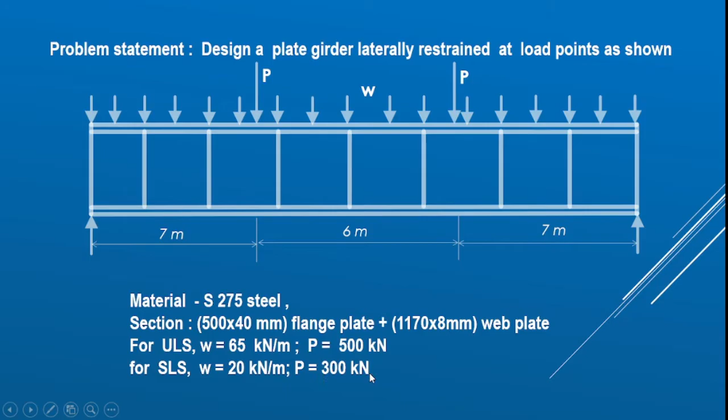For ultimate limit state, that is for the design, the value of W is taken as 65 kN per meter, and the concentrated load at each point is taken as 500 kN. For the serviceability verification, that is for the deflection checking, W is taken as 20 kN per meter and P is 300 kN. So this is IDEA StatiCa member.

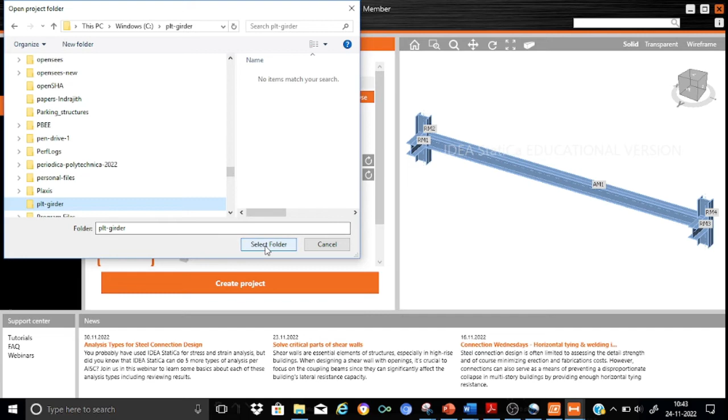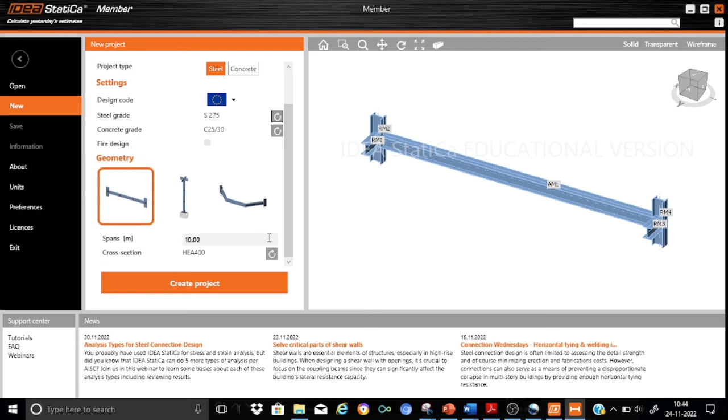The next thing is that the design code will be the Eurocode, and the material I would like to change to S275. So let us take it as S275. Okay, so concrete is not relevant to us. Here, as you can see, there are various geometries. Our geometry is a very simple straight beam, so for span, we can just write as we have already discussed, it has got a span of 20 meters.

And for the cross section, what we can do is that we can directly define it in IDEA StatiCa. So let us, for the time being, just create the project. So we just create the project, and you can see that it has already come over here.

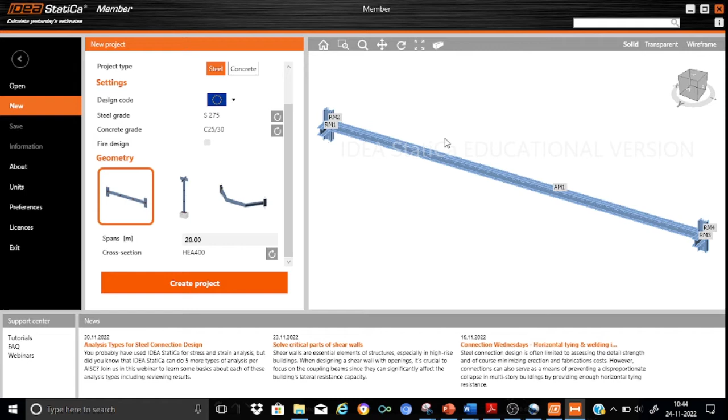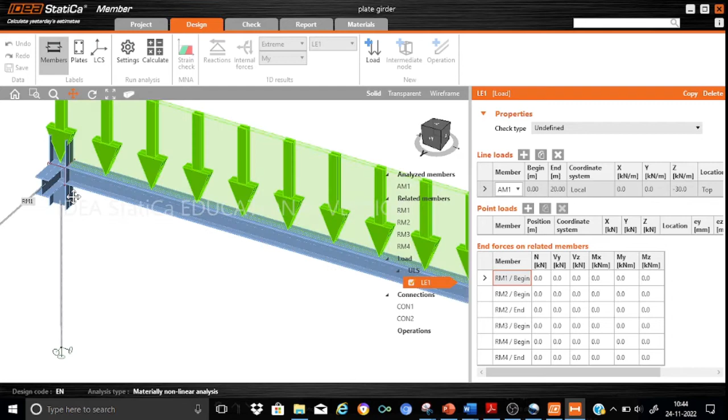IDEA StatiCa member has already created a default configuration for you. So first, what you can do is you can just change all the default settings. For example, as you can see, here we have two columns - look here, we have got one column, and there is one member in the transverse direction. So first, what I'm going to do is delete all these members.

So first, what we can do is we can just go to all these members, RM1. I'll just delete it because I want to keep right now only the analyzed member, and the other members I will add later. So just delete it. Okay, and RM4 - look into the sketch, because when you select a member, it will be changed in color like this. So just delete it.

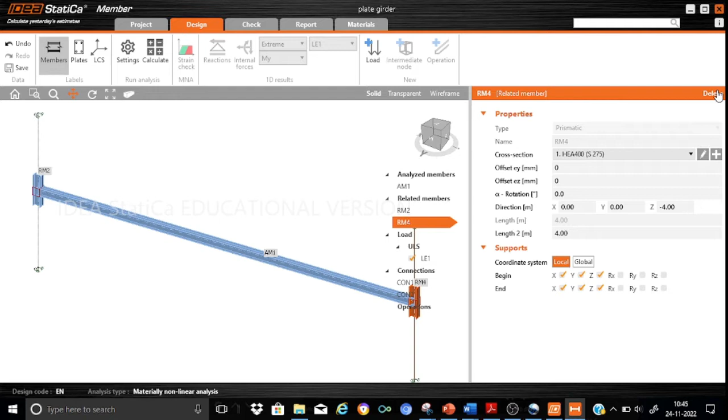Okay, fine. So we have one more member, RM2. Delete that also. Okay, so as you can see, right now we have only one member, that is the analyzed member AM1.

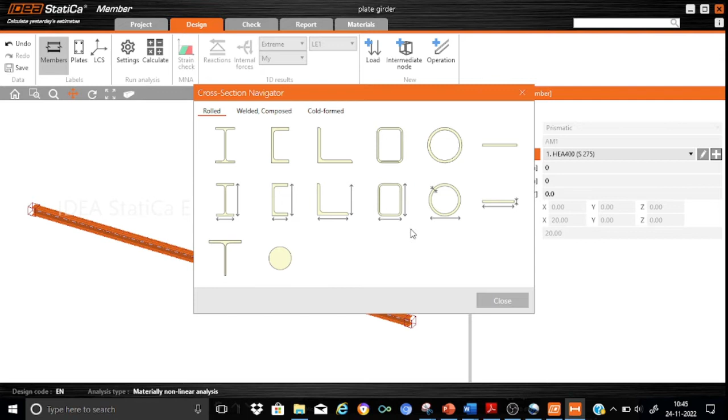So first let us do one thing - let us just edit the properties of this AM1. For that, what you can do is you can just add a new member. Currently, as you can see, that is HEA 400. We don't want that, so please select - we are not going to have a rolled section here, we will select a welded cross section, right?

So we'll select an I girder. Now you can just input the dimensions. For example, by default it has shown a girder of width 200 by 400, that's why it's coding it as 400 by 200.

Based on our calculations, we know the total depth of the girder is 1250, so you can write it as 1250 by, and the width of the girder is 500. Please remember these dimensions are not arbitrary; they are finalized after preliminary calculations made as per the design requirements stipulated in the course. So the total height of the girder is 1250.

Remember the code specifically gives you the minimum depth based on span divided by some factor, normally span divided by 15, span divided by 20. These are all adopted ratios, so you can use those guidelines to come out with a proper depth, which is why I said 1250.

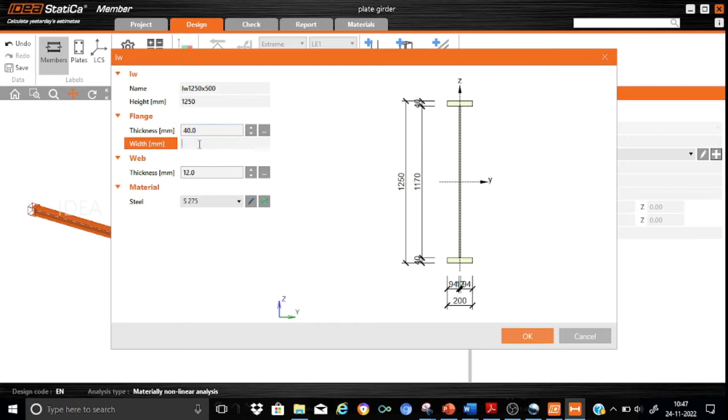Now let us start feeding the sizes of the flange plates. The thickness of the flange plate for this exercise I kept as 40 mm. So we can straight away keep it as 40 mm, and the width we know is 500. So 500, and the thickness of the web we can keep as 8 mm here, and the material is S275.

So we have the flange plate that is 500 by 40 mm thick, and we have the web plate that is 1170 deep and 8 mm thick. So the total depth of the girder is 1250, and we are satisfied with this size.

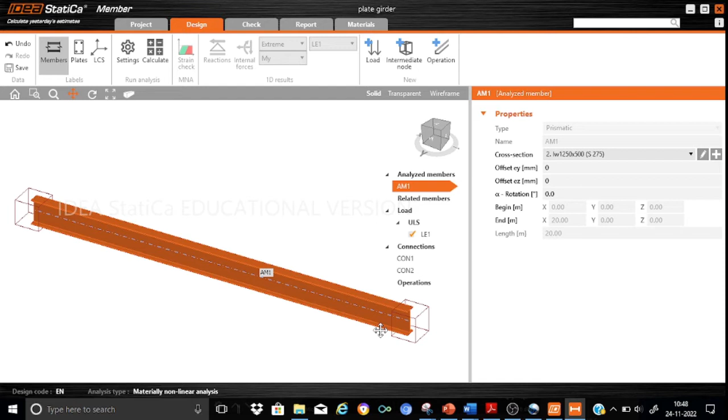Now we need to simulate the vertical supports at each end. The best way to do that is to directly go to CON1, that is the connection at this left hand location of the girder. Here you can add a member, a related member, ended. I don't want the column to extend throughout; this is just for simulation of the support.

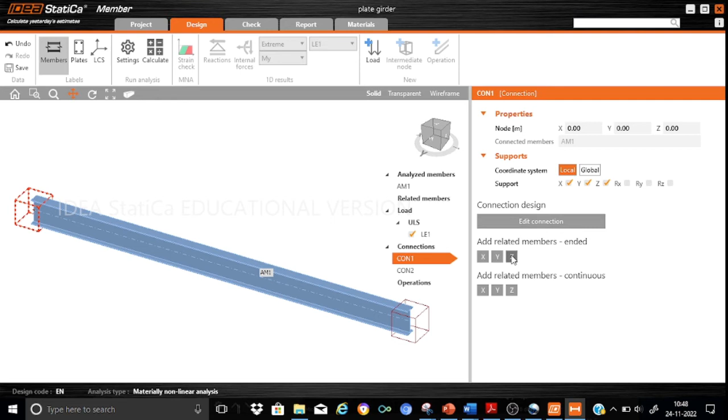I don't want to do any kind of support design here, so I would just provide a member, a related, ended member. Ended means it will stop at the end, and continuous means it will go straight throughout. So we can add it in the Z direction. Now you can see a column member is already added here.

We need to make some modifications, and remember when we modified connection CON1, a member RM2 is automatically generated for us. Now we can straight away start editing the dimensions. I will ensure the width of this column is good enough to provide a seating for my plate girder of width 500. So I will keep the width of the flange for this RM2 also as 500.

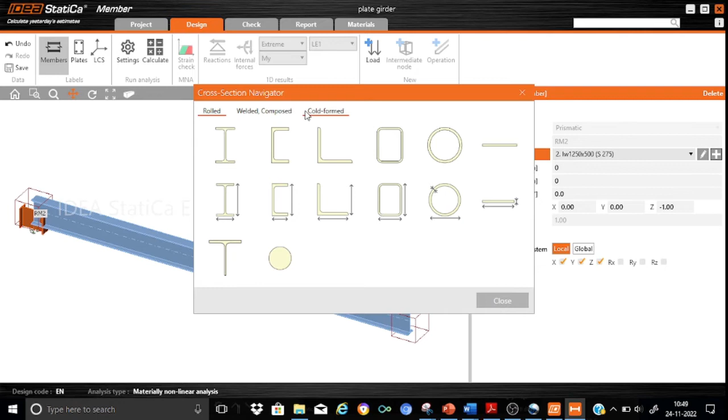Let us edit it. We go here, and for this I will go for the welded composed option. Here I will keep a size of 500 by 500. Remember these sizes are not that relevant, but ensure they allow a proper support connection. The total height of this column support I assume is 500.

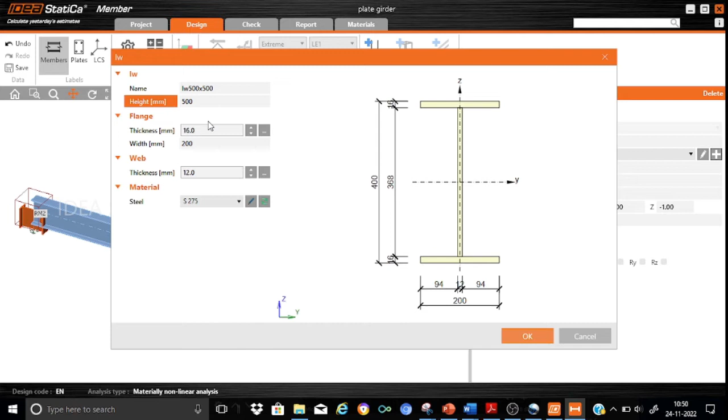Regarding the thickness, we will assume a flange of 20 mm thick, that's good enough, and the width we'll assume as 500. The web thickness I will assume as 6 mm, and I will keep the same material as 275. So you can see 500 by 500, and your plate girder will come and sit over this column. The flange thickness is 20 mm and the web thickness is 6. So this is okay.

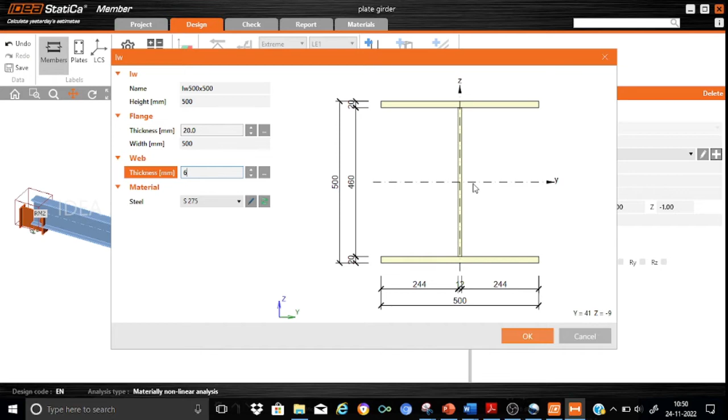So now here what I want to do is ensure that this particular member, my plate girder, which is kept somewhere in between, I want to verify that this analyzed member AM1 is supported directly over this column.

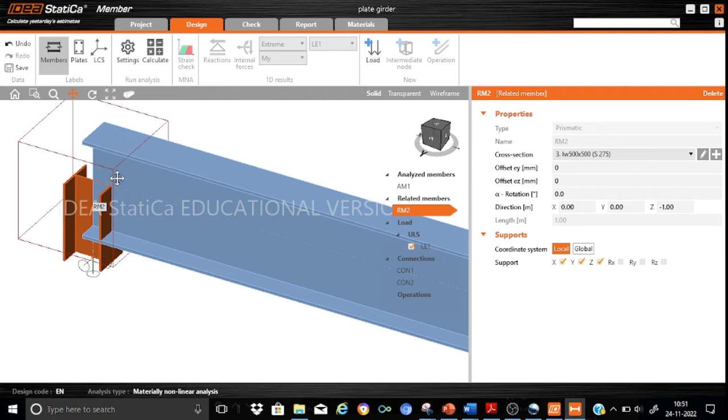So what you can do is keep a shifting. You know that the total depth of this girder is 1250, so if you shift this member by 625 mm, that's 1250 by 2, you will ensure that this particular flange is seated directly above this column. So I will go back to my member AM1 and feed this EZ offset parameter as 625, which is half the girder depth.

So now you can see that yes, there's a plate, my plate girder sits directly above the column. Now I also want this column shifted towards the right so that this flange will match with this edge.

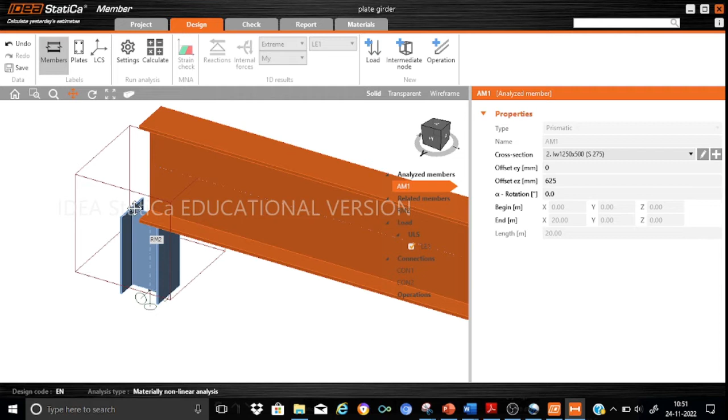So what I would do is go back to my RM2, and in RM2, since the total depth is 500, I want to keep it half the depth again inside. So I'll keep my EZ here. Right now it is 0, that is why you are having this position. So I'll keep this as minus 250. Now look here.

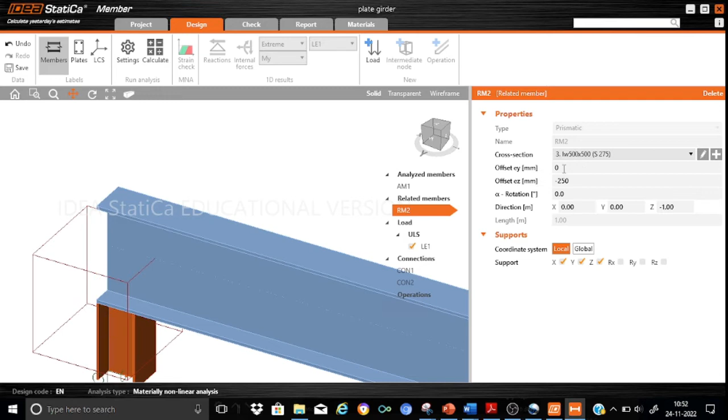Now you can see that yes, this column has, so you can have a look here, right? So this is a plate girder, it is seated directly over the column. So this means that we have generated the column on the left support.

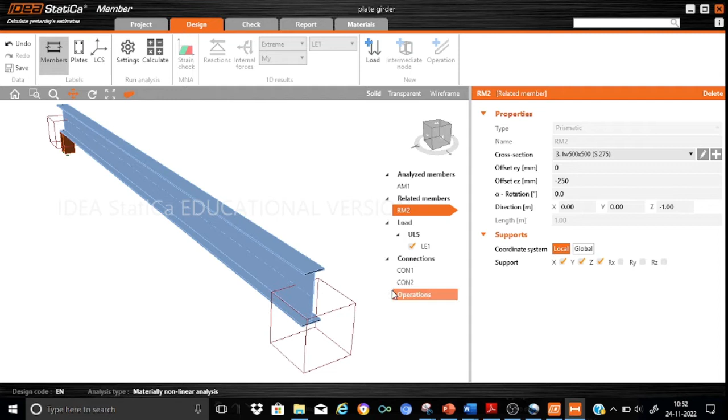Now let us go in a similar way for providing a column member on the right side of the plate girder as well. So similarly, what we will do is go to CON2, indicating this location, and in a similar way add an ended member, which obviously should be added in the Z direction. So you can see that yes, the member is already added.

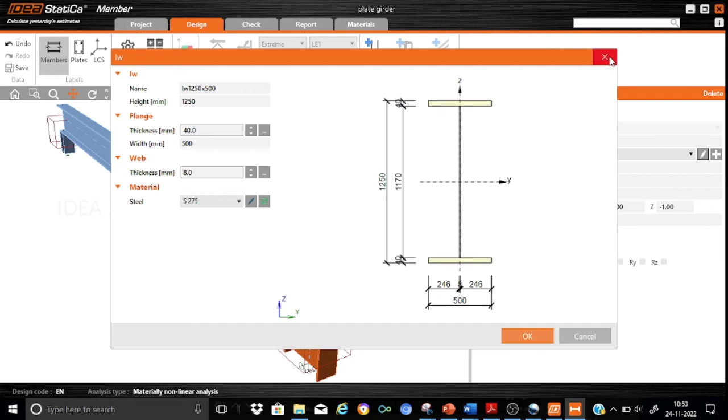So obviously the parameters associated with RM3 will be exactly similar to RM2. In spite of that, let me just edit it, or maybe it is available here already because we have already generated it. It is I 500 by 500. Yes, it is available already.

So nothing to regenerate. And we know the shift which we have to keep for this is equal to plus 250. In this case, I want to keep it towards the left, so instead of minus 250, give it as plus 250. Okay, fine, so the rest is the same.

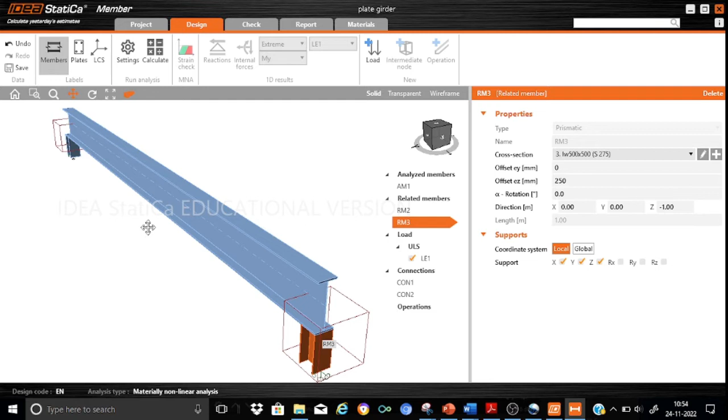So this means we have generated the left column and the right column properly. Now we need to focus on the so-called lateral restraints. Let me just zoom it. Look here, so this support is also properly generated.

Now let us go ahead with the development of the lateral restraints. It is very important for plate girders that you properly fix, after calculations, the location of the lateral restraints. Because in many plate girders, if you look at one supporting a railway bridge, you will find that the top flange is laterally restrained by providing a very effective horizontal plan bracing. So the designer has to ensure what must be the spacing between these lateral restraints.

Now in this case, as I already told you, we have provided a lateral restraint at the support, and also we have the lateral restraint at the load positions, and we know that it is at 7 and 13, etc.

So what we can do is, now it is very important also that you can run a buckling analysis without the lateral restraints, and that will tell you how sensitive your flange is against lateral buckling. Once you fix the positions of the lateral restraints, please also check the effectiveness of these lateral supports against buckling through a linear buckling analysis. So this has to be done by trial and error.

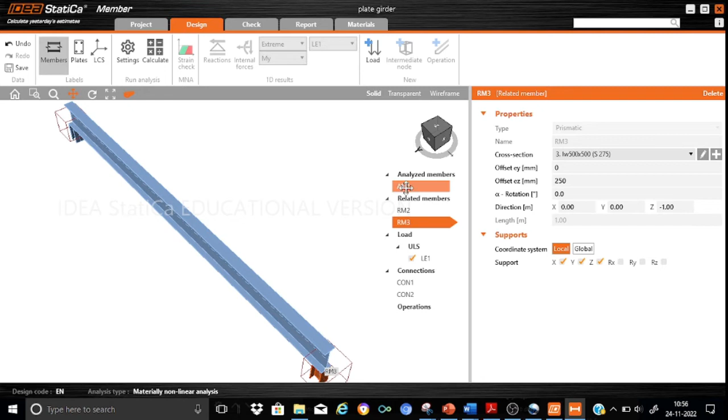What we can do is select AM1, and on AM1 we want to create a lateral restraint. Because we want to have the lateral restraints at 4 points, first create an intermediate node point. It has created an absolute position of 0.5.

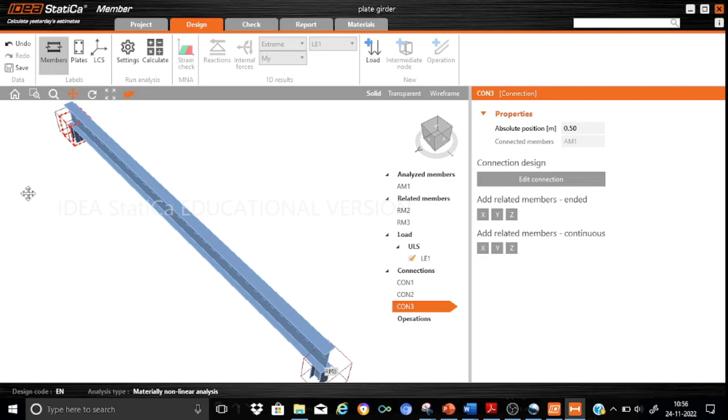Now at this location at 0.5, I want to add a related member, and remember that in this case I want it added not in the z direction but in the y direction. So let me just add in the y direction. As you can see, I have created a lateral restraint beam here.

Just a minute, RM4. Now what we can do is we can straight away go for editing the parameters of RM4. Remember that RM4 is a beam added for the lateral restraining of the compression flange of the plate girder. So let us go again and edit some parameters.

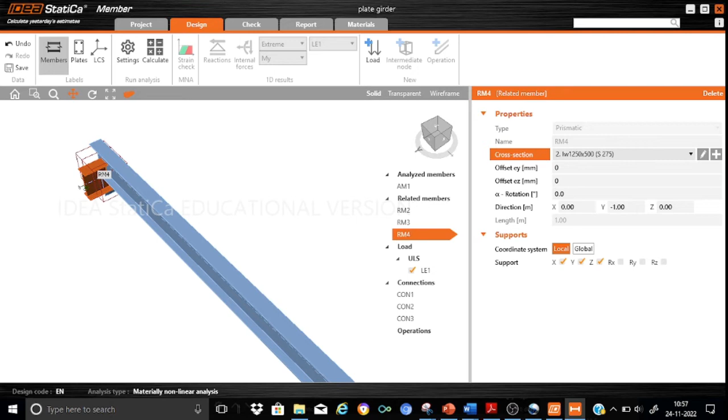I think we don't have a member here. Let me see what members we are having here. We are having only HE. So let me add a very simple member because its purpose is just to provide a lateral restraint. I would like to add an IPE member, IPE 240, and S275. This is good enough for me for the lateral restraint.

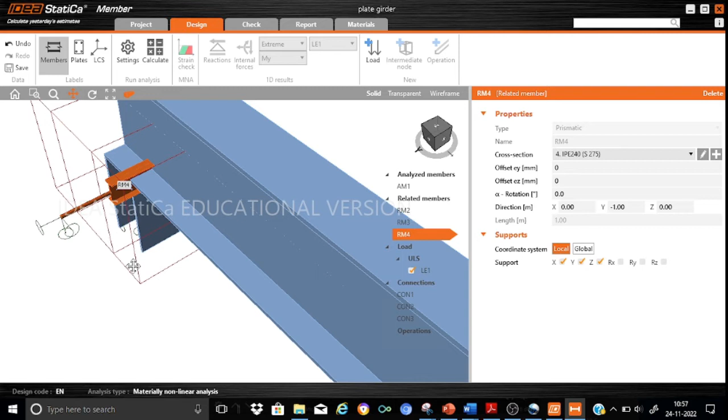Let me just zoom it because it's a smaller size one. Now the problem is I want to add this member, I want to take this member to the top. Currently the top flange is almost at the bottom of this girder.

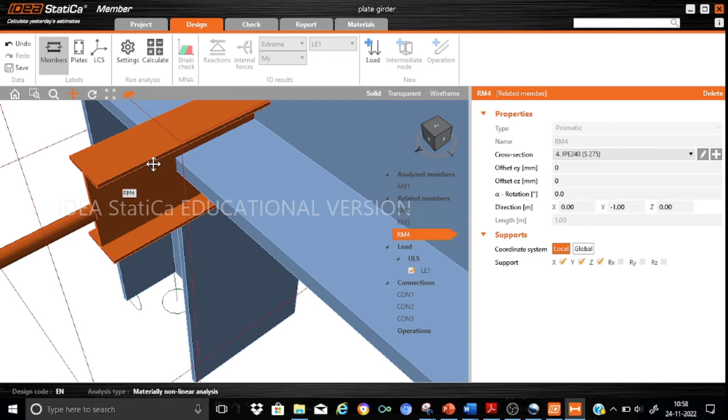Here you can see that the bottom flange is at half depth. So it does mean that since the total depth of this IPE240 is 240, half the depth, that's 120, plus the girder height, that's 1250, means we need to move this beam by an amount of 1370.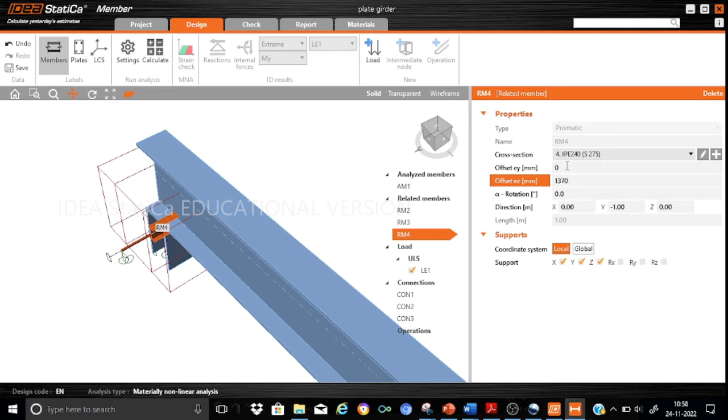Now let us just feed this in. Let's see what happens, 1370. Yes, look here, now I have my beam directly placed over the compression flange. Obviously this will tie my compression flange more effectively.

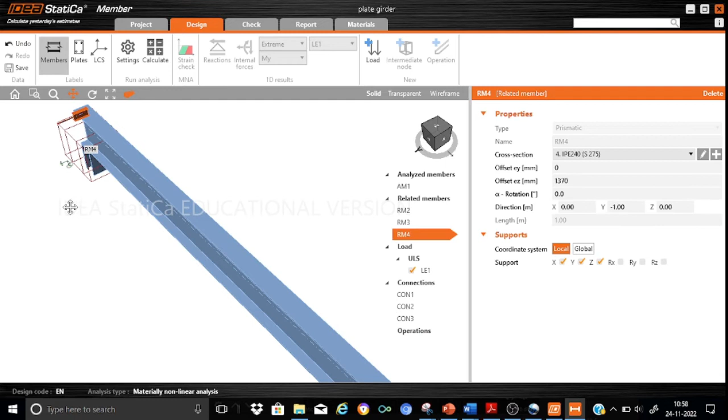Now the same procedure we need to apply to all other locations. This is at x equals 0.5. Now in a similar way let us go on adding very effectively, the same parameters. Select the AM1 intermediate node.

Let me just check my sketch. Yes, it is at 7 meters. One loading point is at 7 meters, so let me just feed it as 7 meters over here. Now we can move faster. At 7 meters I want to have it in the y direction.

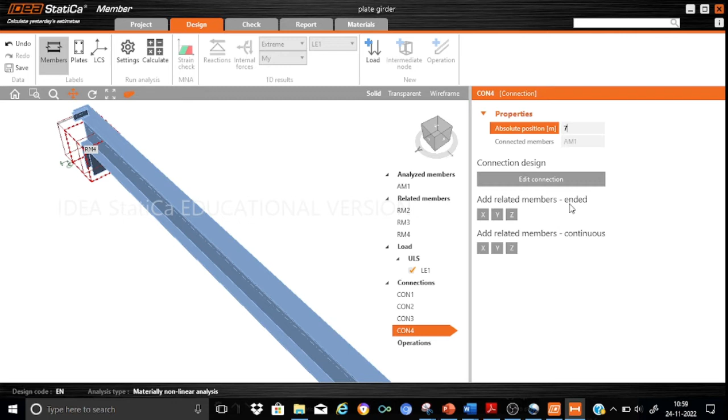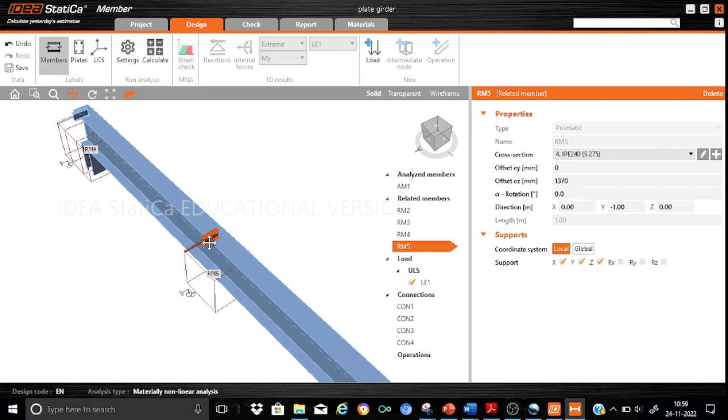So you can see that RM5 is automatically created. You can just change the size to IPE240 because we have already generated it. Just like in the other example, you can keep this at 1370. That must be okay for you. Yes, so we find that we have added a lateral restraint at one location, that's 7 meters.

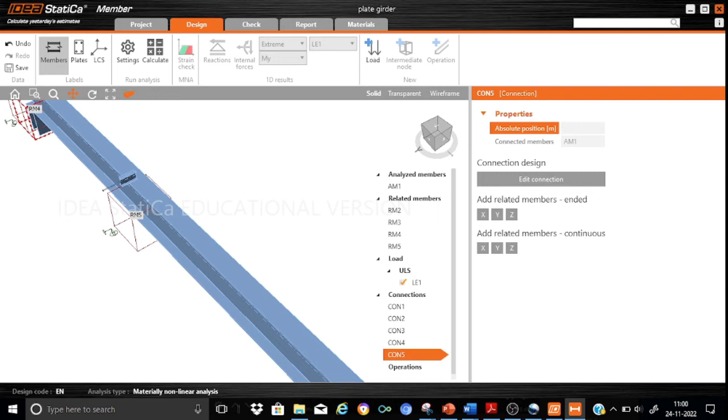Similarly, I will add another member once again. Go back to AM1, generate an intermediate node. Now it will be at 13, as the location of the other loading point, 13. Add a member in the y direction. Yes, you can see that we have added a member in the y direction, and that is RM6.

Just going on editing the sizes, that will be IPE240, and obviously my offset will be 1370, just like the other member also. You can find that, yes.

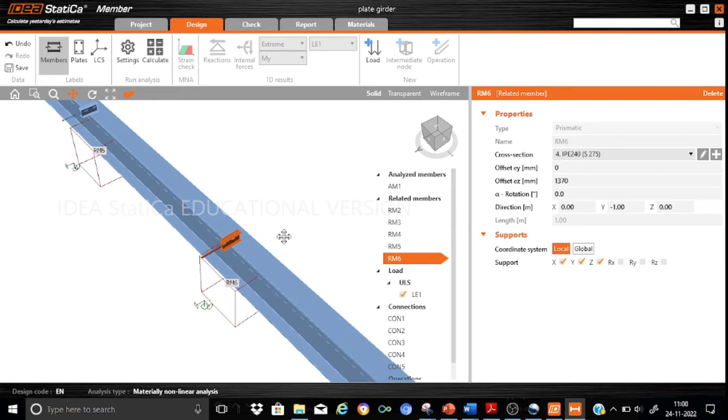So we have added, and now what is left is we have to add one more member at the right support. So in a similar way, go back to AM1. Add an intermediate point, and here what we do is we keep it not at 20, I'll keep it at 19.5.

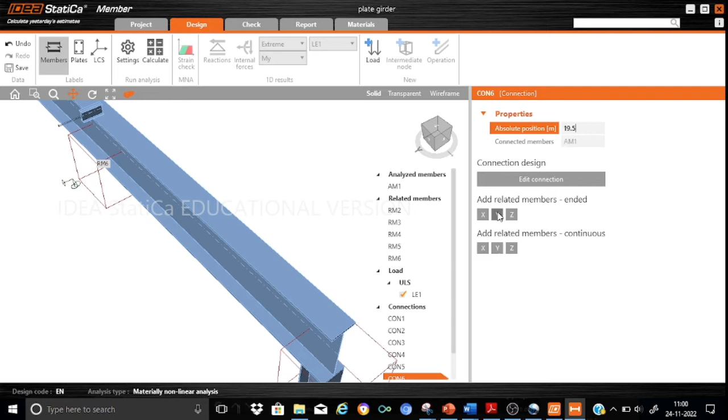So 19.5. I'll just add a related member in the y direction. So you can see that it is being added. I have got an RM7. Just to change the size as usual to IPE240, and then we have an offset of say 1370.

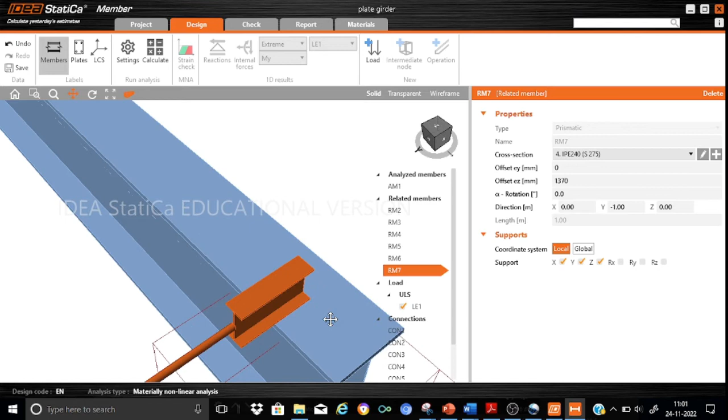Okay, you can say yes. So look here, we have generated all the beams required for providing us the lateral restraints. Our main member is AM1, which is to be analyzed, this girder, and we have got two supports, RM2 and RM3, and four lateral restraints, RM4, 5, 6, and 7. So now let us proceed for editing or providing the connections between the analyzed member AM1 and the corresponding related members RM2 to RM7.

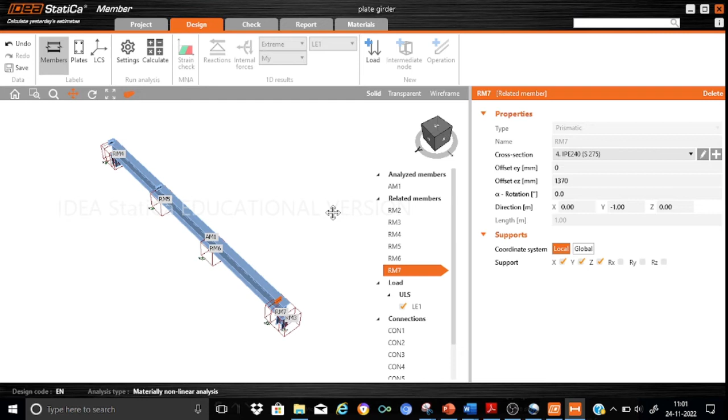So let us proceed for editing the connections. Let me select the connection here CON1. You'll find that this connection is highlighted. Just edit the connection. Here I want to just add an end plate connection.

So let me just edit the connection so that the program will automatically switch over to the Idea Statica connection, and that lets you edit the connections. And here I want to repeat once again that this Idea Statica module is not intended for verification of any connections. So here you can see that yes, the connection is highlighted.

Here what I want to do is just provide an end plate here, and in order to simulate a pinned condition at the support, I want to just use one bolt on each side of the flange. Remember, my intention is not to model the entire connection, but just to simulate the pin connection.

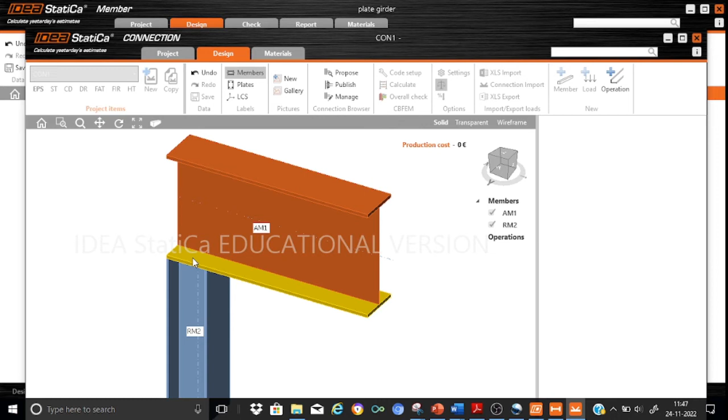So what I do is I just go to the operations, and add the operation. For the operation we have got the end plate, go straight to the end plate operation, and you can just add say M20. For example, say 6.8 M20, because we are not going to verify these connections, just for analysis purpose we are simulating it. Okay, fine.

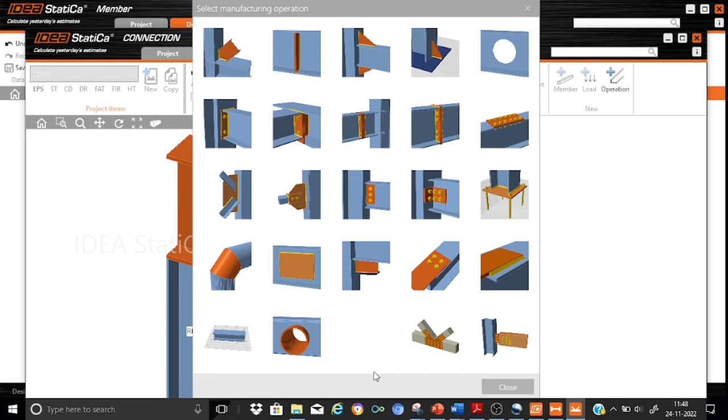So we know that it has to be... look here, it has come directly over to AM1. I don't want it over AM1, I want it on the other member, that is RM2. So you go directly to RM2. Okay, fine, and fantastic.

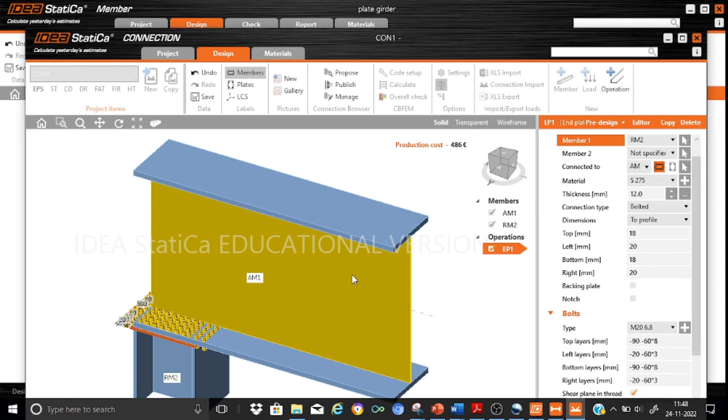So you'll find that there is a host of bolts, a number of bolts that we can quickly change. That's not a big issue at all, and it is connected to AM1, S275, and the thickness, you can keep it as for example the end plate thickness, say 20 mm, right? 20 mm, that's good enough, and bolted.

And all these offsets, what you can do is keep them as 0 0, right? This will be 0 and this will be 0. Okay, this is 0 0. All these offsets I will keep to 0, so that this ensures my end plate is flush with this member RM2.

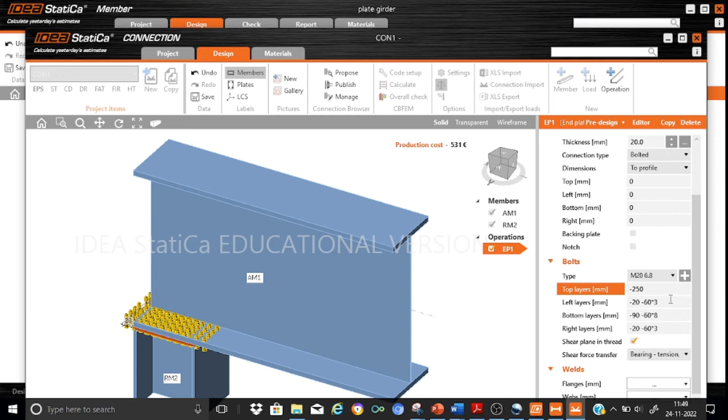Now coming to the bolts, what you can do is I want only say two bolts, not this many sets of bolts. You can straight away go over here. The top layer, for example, you can set it over say minus 250. I don't want this much of rows, I want only a single bolt, 250, and I can keep the left as for example minus 120. These are all calculated dimensions so that the bolt will fit properly.

And the bottom I don't want to fit in this case, it is not relevant to me. And the right one I will keep it as say minus 120 again, minus 120, and I think the rest of these parameters, let us leave unchanged. These are all good enough.

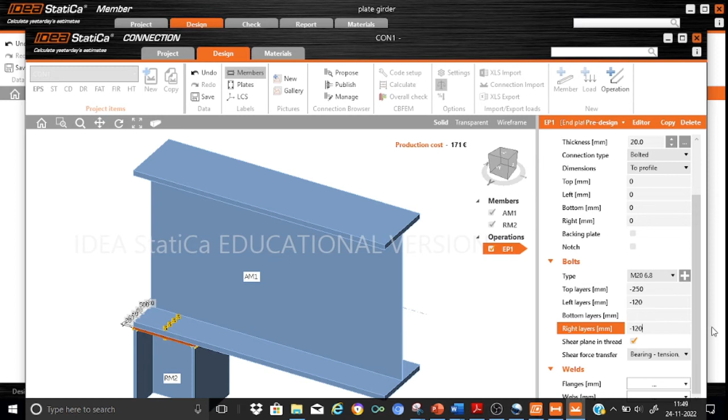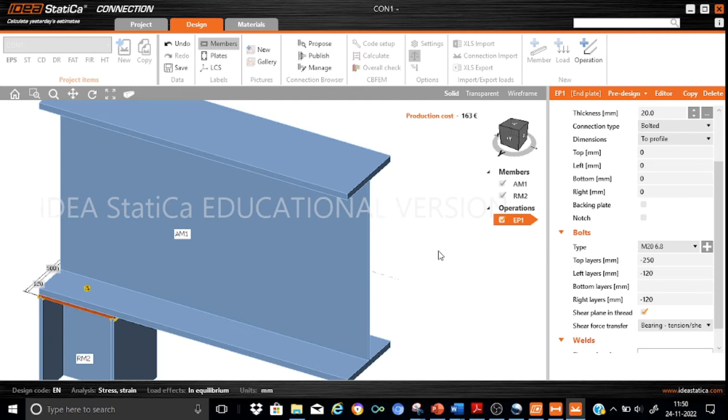So now okay, yes, we have M20, the layers 120, okay just a minute, and the right. Okay, so now look here, let me just show you, because you'd also like to know what kind of support we have generated. So look here, I have just generated a single bolt connection.

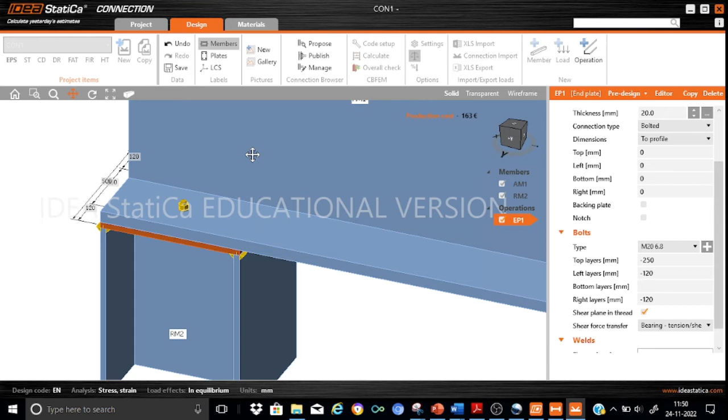Okay, it is just a single bolt connection. The single bolt connection is intentionally created because if you put a large number of bolts, the support will develop moments. So I want to ensure that it's a pin connection. This means we have generated one connection properly. Let me just save this so that it will be available for me in the connection.

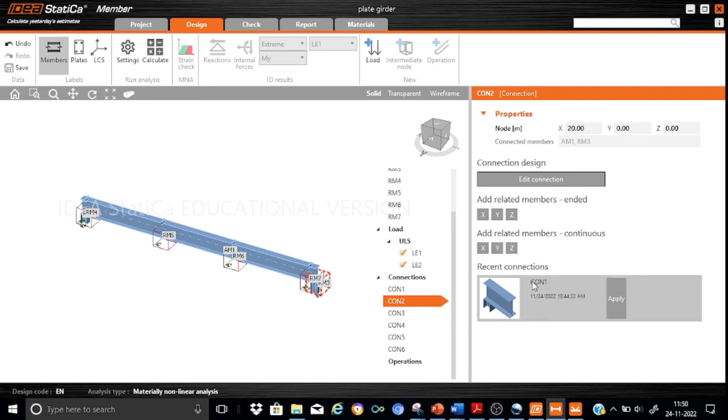Now we know that, for example, if you go to CON2, this connection should be the same as CON1. So what we need to do is just select CON1 and apply it. We need not generate it again — it saves a lot of time for us. You can see whether the same is generated or not. Look here, yes, the single bolt connection I do have, so you don't have any kind of problem. Single bolt connection is already mobilized.

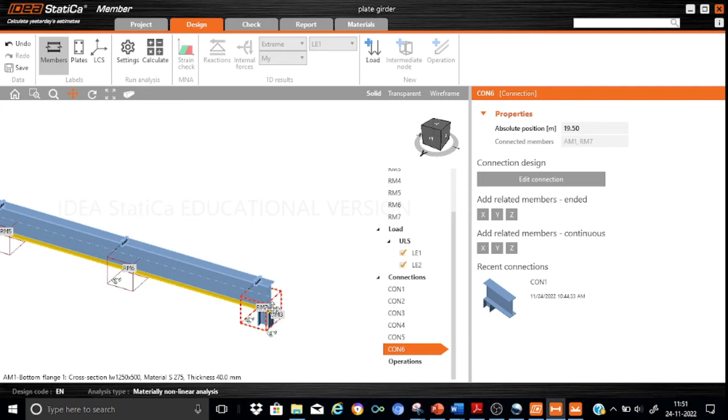Now we need to modify other connections, CON3. We have CON1, CON2, and CON3. The CON6 is not relevant to us. Let me just zoom in over here. What is this? Okay, so we can just delete it, it is not relevant. Okay, this is fine.

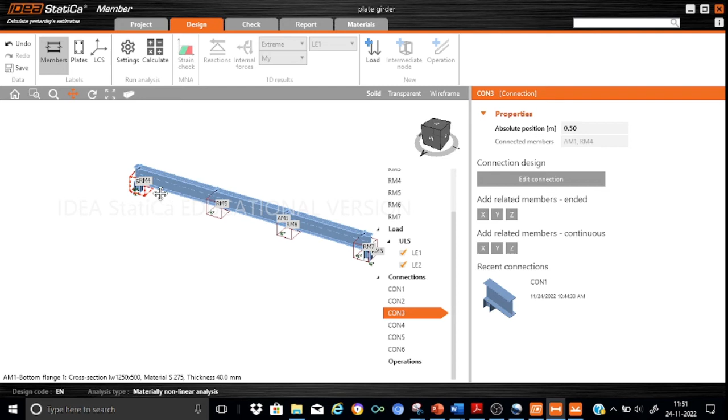So now this is relevant. Look here, this is between the two connections, that is between AM1 and RM4. AM1 is this member and RM4 is this member, that's a lateral restraint beam. So let us start editing this connection — just edit the connection.

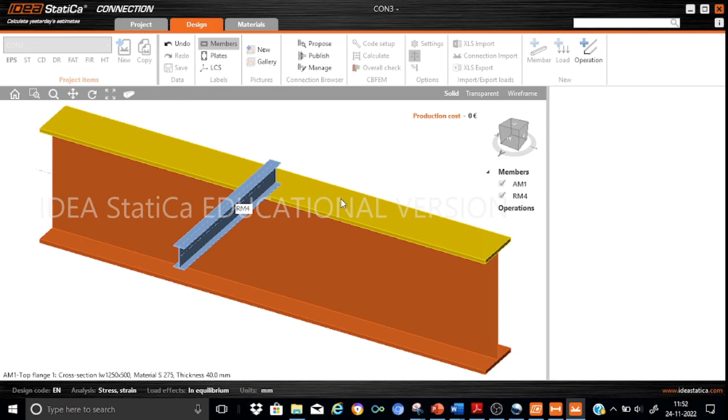Okay, so here I just want to place the two bolts, in order to ensure that this is directly connected with the plate girder flange. For this, what I will do is go straight to the operation, and in the operation there is one known as the bolt grid operation. It is over here, I remember. Yes, look here, this is a bolt grid operation. So just select it. Okay, don't worry about this — we are going to feed all the data.

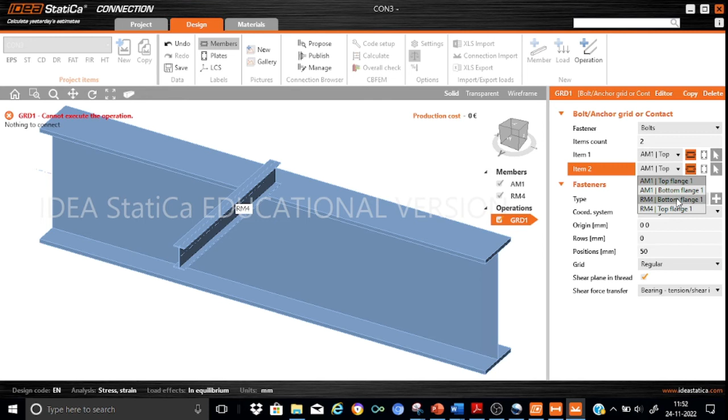So fasteners, bolts, item count 2. Now you select what members are to be selected. We know that one is AM1, so it is a plate member — AM1 is already selected. Now coming to the other one, I want to connect it with my RM4, and remember that we want to connect to RM4's bottom flange. Okay, so the warning is already over.

Now it's a matter of just providing the dimensions. So item count, everything is provided, and the origin will be kept as 0. For the positions and the rows, we keep it as -75, -75, and then -100, -100. Then positions — these are all pre-calculated dimensions — -35, -35, and positions we have to keep as -35, okay, and then 70, 70, and the rest remains the same.

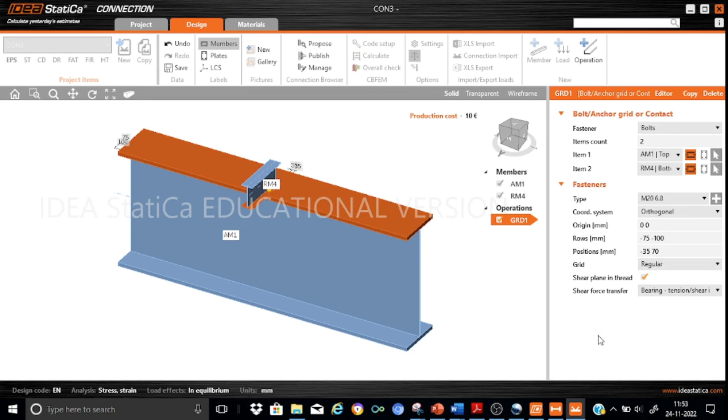So now let us see whether the required bolts are being created. Just zoom it — look here, two bolts are already generated. That is fine. Now we can just copy this connection for the other parts. Save this, and now it is very easy for us to go ahead.

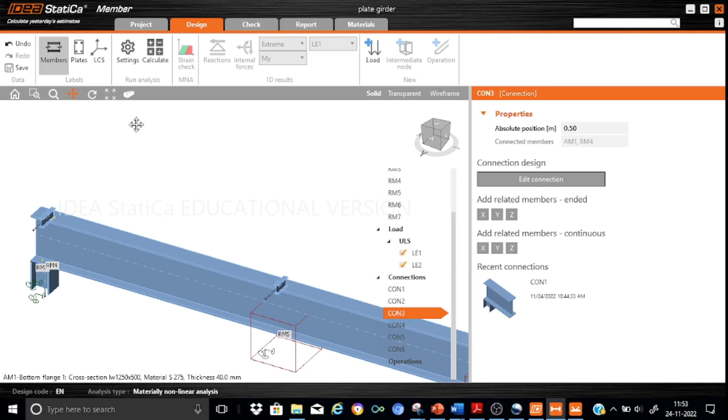Let us start creating the other connections. Let me just take this a little bit up. Okay, this is already generated — you can see, look here, it's already generated. Now it's just a matter of copying. So CON3 is over. Now CON4 is the connection here, and you can see which members connect to it. So we know CON3 is already available to us.

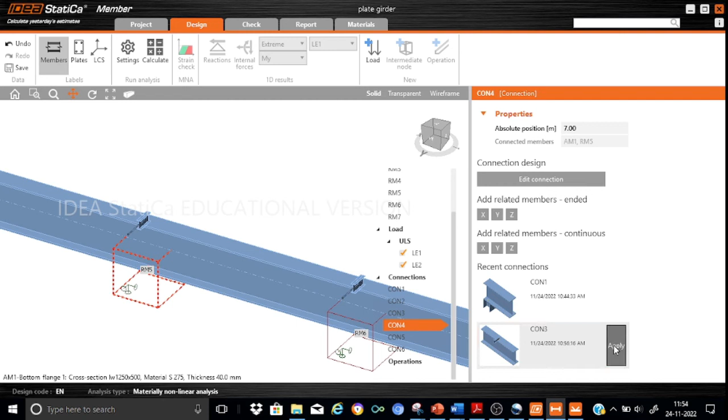So we just need to apply it — we need not regenerate it. Look here, it is automatically generated. Now similarly let us go for CON5. CON5, go to CON3, apply. So we find that once a connection is generated, it can be easily copied — this is what we are doing right now.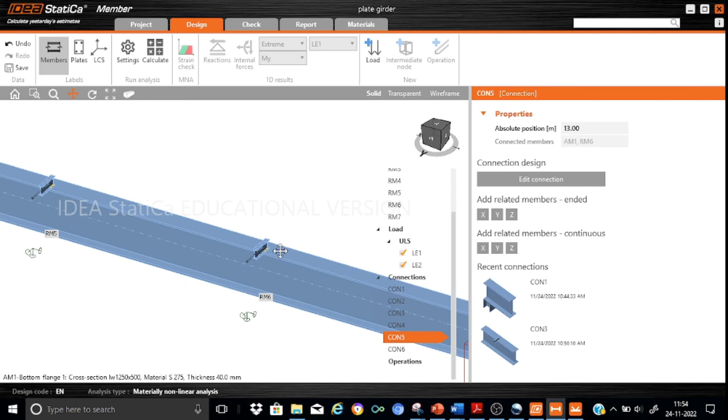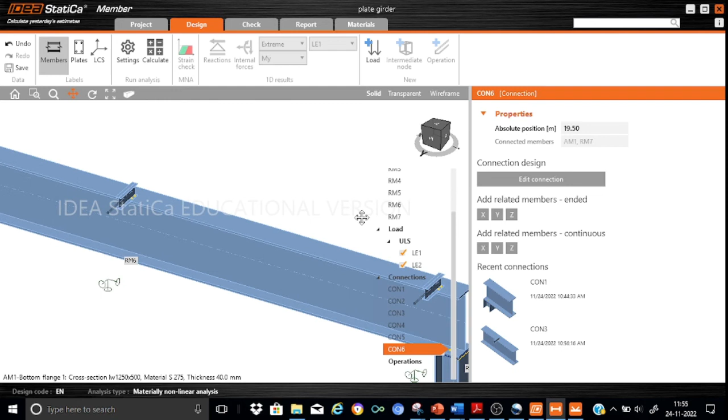Now finally one more connection is required, that is CON6. Go over here, CON3, and apply. Okay, fine, so look here — this means we have generated all the connections, that is the connection between all the related members. The analyzed members are now over. Now it's time we straight away go for the load applications, and here what I did is generate two loads.

I will use LE1 for the design, not worrying about ULS, and LE2 I will use for the serviceability verification.

As you know, this is subjected to three loads: one uniformly distributed load and two point loads. So let us start feeding these loads now.

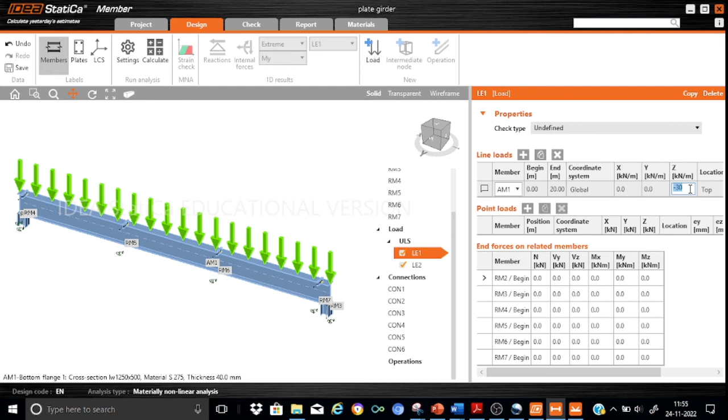The uniformly distributed load acting on AM1, let us change it to global. In some cases that may make a change. We know the intensity under LE1 is -65 kilonewton per meter. I apply it over the top, and keep this as 0. That's all about the uniformly distributed load.

Next we can start adding the concentrated loads at two locations. I will apply the concentrated load as a line load only, keeping the width of the line load as 0.2 meters. Our concentrated load was 500, so converting it into a line load of 0.2 meters, the value will be 500 divided by 0.2, which is 2500.

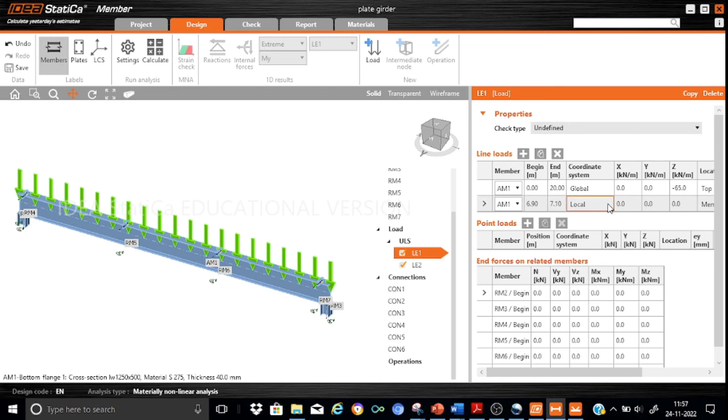Let us add another line load here on AM1, acting over 7 meters. So I will apply it from 6.9 to 7.1, spread over 0.2 meters. I'll change this to global, and ensure the intensity is properly entered - instead of 500, it will be minus 2500, since we're distributing it over 0.2 meters, keeping it over the top flange. All other dimensions remain the same.

We can add one more concentrated load at 12.9 and 13.1. We'll keep it as global, with intensity minus 2500, on the top of the member axis, and all the width values will be zeros. That's all regarding the line loads and concentrated loads.

For LE2 it remains almost the same, only the load values need to change. So I will go to LE2 and add similar values - I'm not going to repeat that procedure here, I'll add all the required values corresponding to the serviceability limit state.

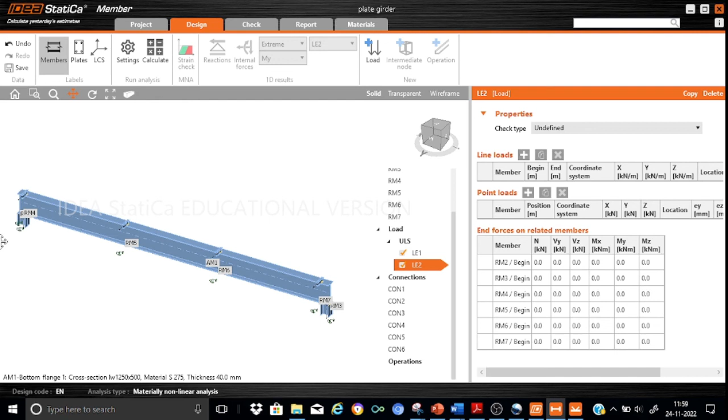Normally we need to add a bearing stiffener, and also some kind of stiffener directly under the loads which acts as a bearing stiffener. Also, to ensure no shear buckling occurs, we need to spread intermediate stiffeners across the length of the girder. This is a bit elaborate, so though it's part of the modeling, I'll take the addition of intermediate stiffeners as the next part. Please jump to part 2 of this tutorial to witness all the important steps required for modeling and analysis of the plate girder.